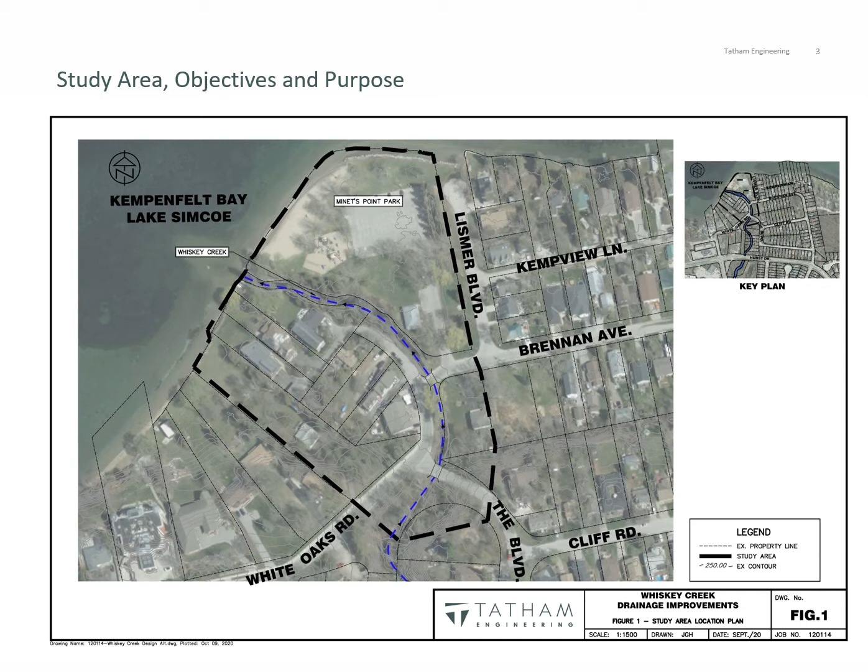The focus of this environmental assessment is to reduce the frequency of flooding associated with Whiskey Creek through the study area. However, we understand the public has concerns regarding Lake Simcoe water levels and flooding along the shoreline. Although shoreline flooding will not be addressed through this EA, we want to provide an overview of how and why Lake Simcoe water levels are managed.

Lake Simcoe is part of a much larger system known as the Trent-Severn Waterway. The Trent-Severn Waterway is 386 kilometers long with 18,600 square kilometers of interconnected lakes, rivers, and channels which connect Lake Ontario at Trenton to Georgian Bay at Port Severn.

Hundreds of thousands of people rely on the waterway for drinking water, flood control, tourism, and recreation, and the waterway provides water for power generation, municipal water supply, agriculture, and supports a variety of fish and wildlife. The city of Barrie is one of nearly 50 communities located on its shores, which is impacted by the management of this waterway.

Lake Simcoe water levels are managed by Parks Canada via the Trent Severn Waterway. Typically, Lake Simcoe water levels vary by 0.4 to 0.5 meters during any given year. The highest levels occur in the spring, and as the summer progresses, the water levels begin to drop. The lowest levels are reached in late fall and winter.

As Lake Simcoe is part of the larger Trent Severn Waterway, actions taken to alter the water levels in Lake Simcoe cannot occur without repercussions elsewhere in the waterway. As such, the management of the Trent Severn Waterway is extremely complex and considers all of the varying needs and impacts that each decision or action will have on the rest of the waterway.

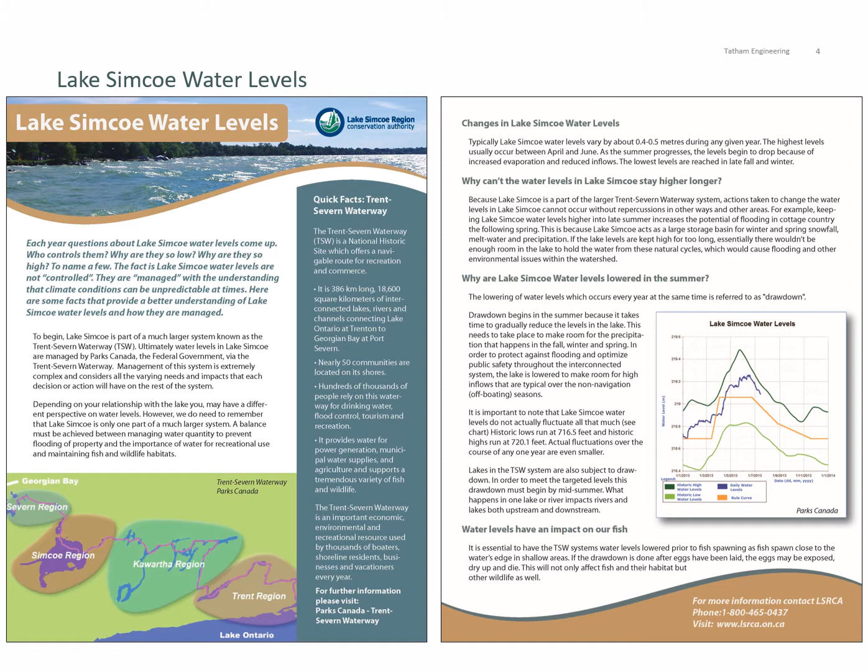Parks Canada describes the management of the Lake Simcoe water levels as follows. Lake Simcoe is controlled by several dams constructed in multiple outlet channels at Washago. Parks Canada monitors and manages water levels throughout the year to ensure sufficient water for navigation, to preserve ecological integrity, and to provide flood mitigation to the extent possible for the lake and the Trent Severn Waterway. Water level management on Lake Simcoe adheres to a complex protocol that incorporates many contributing factors and considers the entire watershed network.

In general, the water levels of Lake Simcoe and Lake Couchiching are operated based on target levels that resemble natural lake level patterns, such as the rapid rise in the spring, the gradual lowering through late fall, followed by the constant levels in the winter. These target levels are based on operational and navigation requirements, topography and hydrology, the protection of public safety, ecological considerations for wildlife and fisheries, as well as socio-economic considerations.

In addition, water levels in Lake Simcoe respond slowly to water management operations, and the lake levels are not easily adjusted by the dams, unless there is significant time in which to discharge water. It may take several days of water management operations using the dams in Washago to impact water levels or to reach the targeted level while taking into account downstream conditions. The Lake Simcoe water levels fact sheet presented on the previous page is available on the project website. Additional information is also available on the Lake Simcoe Region Conservation Authority and Parks Canada websites.

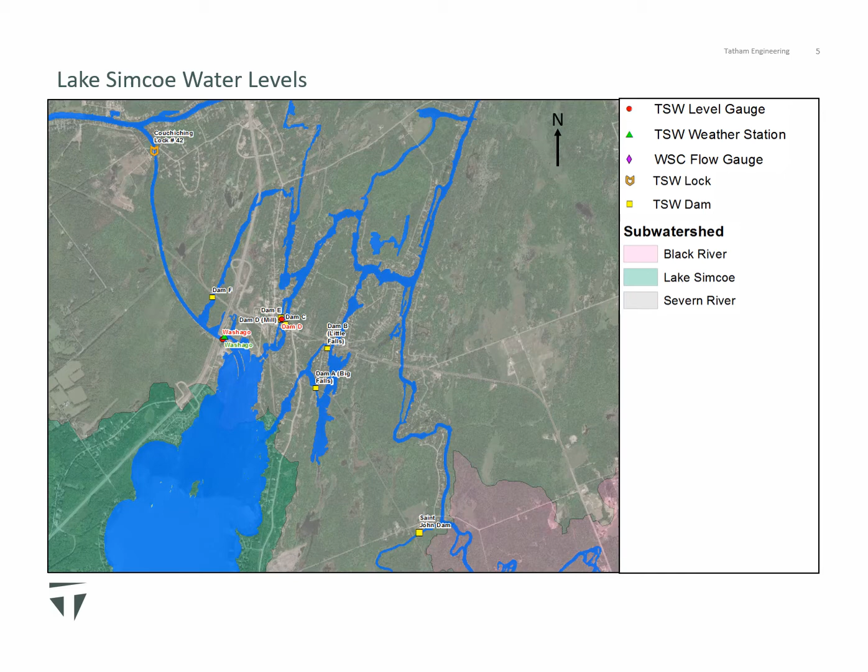So what is a municipal class environmental assessment? A municipal class environmental assessment is a planning and design process to identify, compare, and evaluate alternative solutions to an identified problem. It applies to all municipal road, water, and wastewater projects and significant private projects as per the Municipal Engineers Association Municipal Class Environmental Assessment document. It ensures all aspects of the environment, physical, natural, social, cultural, and economic, are considered in the evaluation and selection of the preferred solution to be implemented.

This EA has been identified as a Schedule B project, which means it has potential for moderate impacts and ends at the conclusion of Phase 2 of the EA process. Consultation is being conducted to present the issues identified, the alternative solutions developed, and the preliminary evaluation of these alternatives, as well as elicit comments and feedback from the public to assist with the confirmation of the preferred alternative solution.

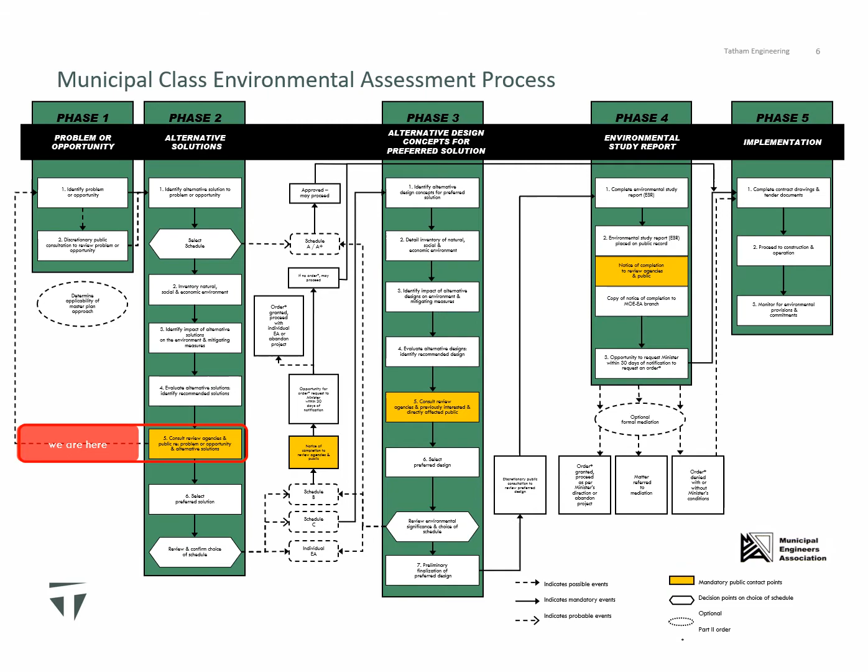Draft Class EA Report and supporting documents. In support of this environmental assessment, a Draft Class EA Report has been prepared, which is available on the project website for review. The Draft Class EA Report summarizes the problem, the project environments, the existing drainage systems, the alternative solutions evaluated, and the preliminary preferred alternative solution identified. For additional information beyond what is provided in this presentation, please refer to the Draft Class EA Report. If you require accommodations to review the Draft Class EA Report, please contact Ling Ling He, Senior Water Technologist at the City of Barrie, at the address and phone number provided later in this presentation.

As part of this assessment, the design storm peak flows through Whiskey Creek within the study area were confirmed with the LSRCA. Also, the existing capacity of Whiskey Creek and the culvert crossings at Brennan Avenue and the Boulevard were established along with the extent of flooding in the study area. Through this analysis, the Boulevard Culvert Crossing was identified as having the limiting capacity of less than the 1 in 2 year design storm peak flow through the study area. The Brennan Avenue Culvert Crossing and Whiskey Creek Main Channel have similar capacities equal to the 1 in 2 year design storm peak flow.

When flow within Whiskey Creek exceeds the capacity of the drainage system, flooding is expected to occur on the Boulevard and Brennan Avenue, along White Oaks Road and Lismer Boulevard, through Minet's Point Park, and through private property. Each alternative solution considered does reduce the frequency of flooding. However, the magnitude of the reduction is dependent on the alternative solution. The hydrologic and hydraulic modeling technical memorandum is included in Appendix A of the Draft Class EA report for reference.

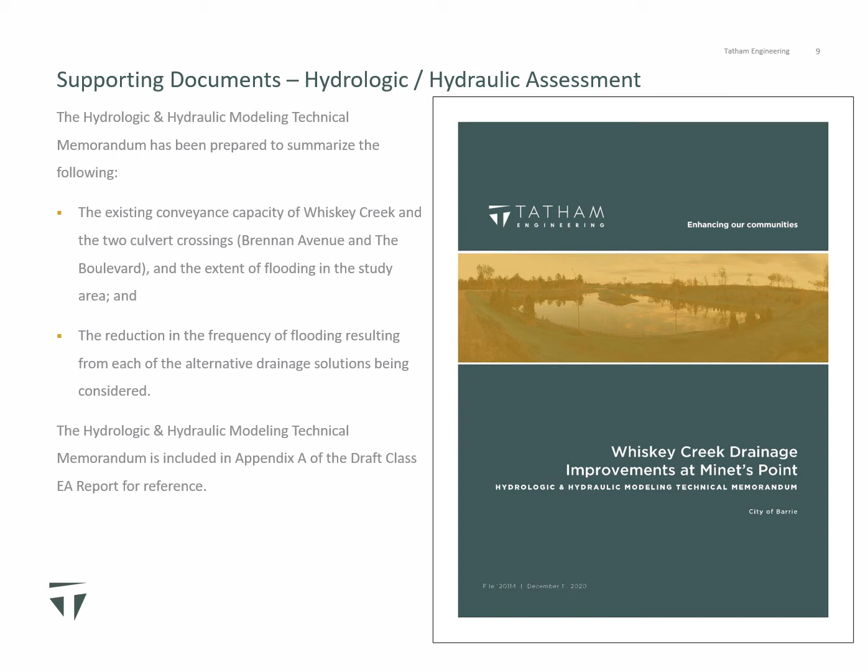Water's Edge Environmental Solutions team reviewed Whiskey Creek to determine if the watercourse is actively eroding, establish what conditions create erosion, and the amplitude the main channel is expected to meander over time. The assessment concluded that Whiskey Creek through the study area is eroding and in a transitional state, and each improvement option considered needs to address erosion. Specifically, any improvements completed along Whiskey Creek should use natural channel design principles and incorporate a 6-meter bankfull channel width into the design. The Fluvial Geomorphological Assessment and Design Alternative Review is included in Appendix B of the Draft Class EA report for reference.

A traffic impact study was completed to establish the existing conditions of the transportation network in the overall area. Specifically, the traffic impact study assessed the existing road network, traffic volumes, and traffic operations. The study concludes that there is ample capacity available on Minet's Point Road and Brennan Avenue to accommodate existing traffic volumes and facilitate future growth, and the existing intersections provide good conditions. No improvements are required under current conditions.

As part of this study, the alternative solutions involving transportation system modifications were evaluated. It was concluded that the transportation system modifications would result in more circuitous travel for both area residents and visitors, given the road system changes contemplated. From a traffic operations perspective, all alternatives can be accommodated. However, the removal of sections of road will also reduce the number of access points to the local road system, which is a concern from an emergency access perspective. The traffic impact study is included in Appendix C of the Draft Class EA report for reference.

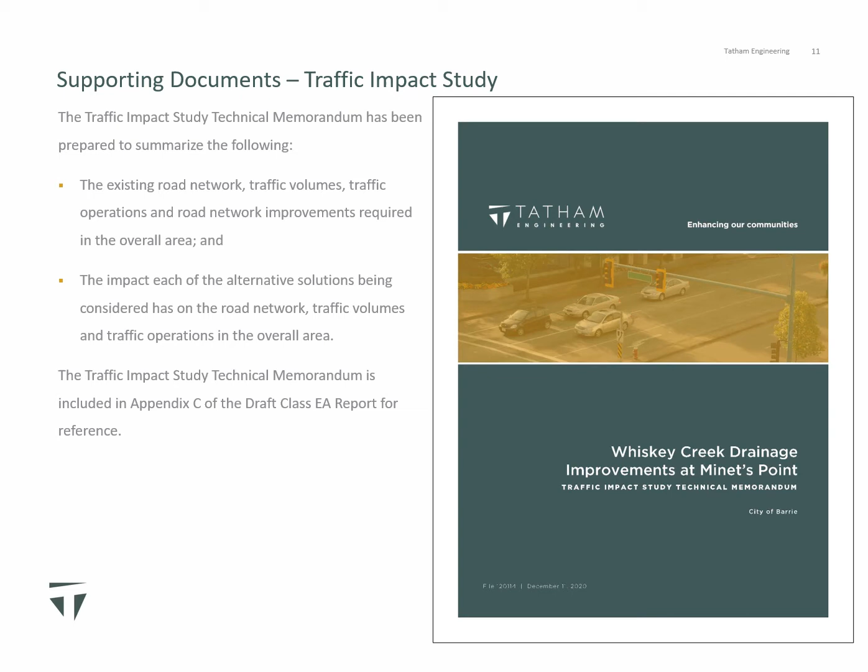Riverstone Environmental Solutions conducted a natural heritage study to identify the natural heritage resources in the study area, evaluate the impact the alternative solutions being considered will have on the natural environment, and identify mitigation measures to address potential impacts of each alternative solution on the natural heritage resources. The assessment concluded that Whiskey Creek through the study area is a cold water fishery, and the mature trees lining its banks provide potential habitat for 2 endangered species, being the little brown bat and the northern long-eared bat, although no endangered species were witnessed in the study area during the site investigations completed. The Natural Heritage Resources Technical Memorandum is included in Appendix D of the Draft Class EA report for reference.

Archeoworks completed an archaeological assessment to identify areas of archaeological potential in the study area and identify any potential impacts related to each alternative solution being considered. The assessment concluded that portions of the study area are considered to retain archaeological potential, specifically the areas that do not exhibit extensively disturbed conditions, such as the pockets of overgrown vegetation flanking Whiskey Creek, the manicured lawns in Minet's Point Park, and several residential properties, and the woodlot immediately upstream and downstream of the Boulevard.

Each alternative solution being considered has the potential to disturb one or more of these areas. As such, a Stage 2 archaeological assessment must occur prior to the implementation of the alternative solutions being considered. The Stage 1 archaeological assessment is included in Appendix E of the Draft Class EA report for reference.

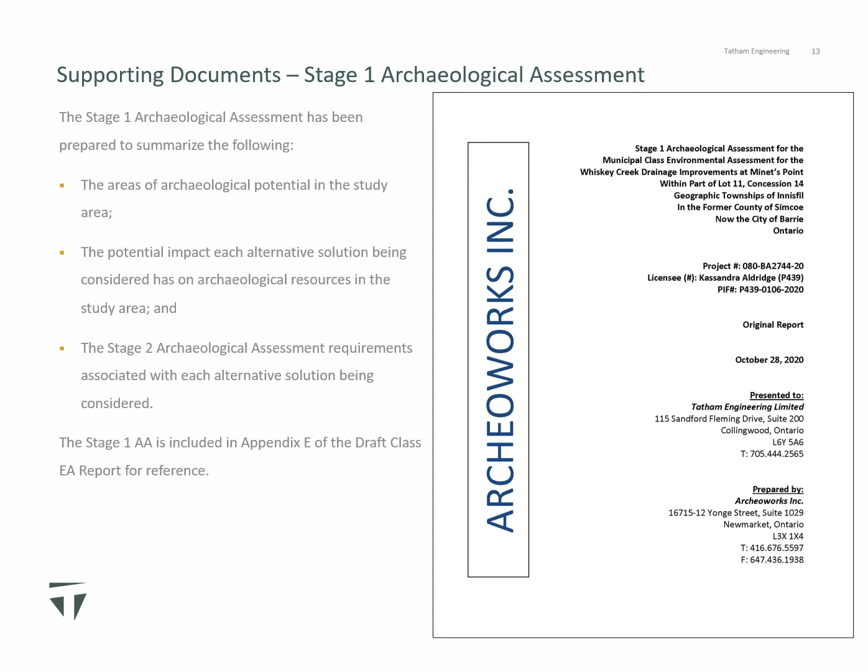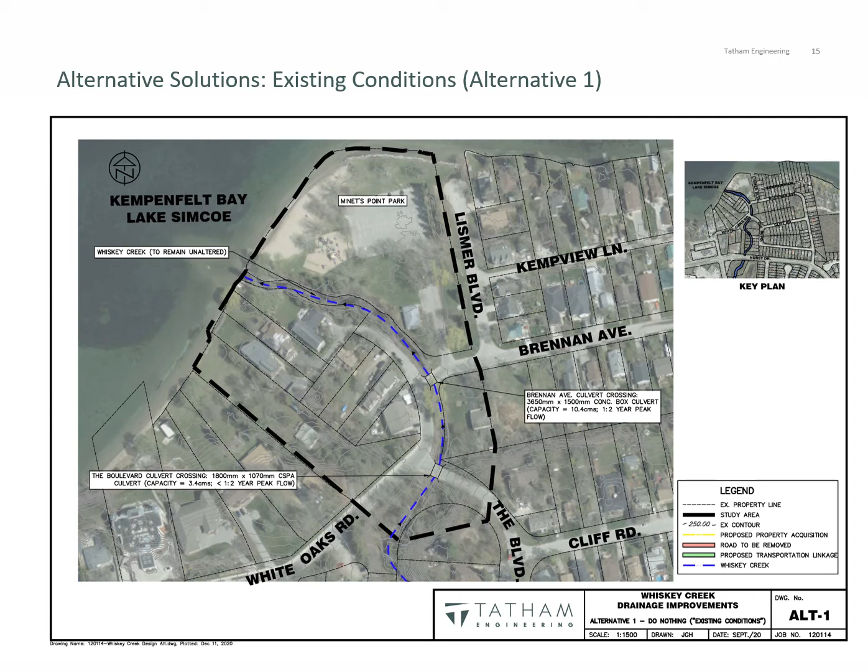Alternative solutions. Alternative 1, or the do-nothing alternative, allows for the consideration of not making any changes to Whiskey Creek from the Boulevard to Kempenfelt Bay. This alternative is being considered to provide a benchmark to gauge the physical, natural, social, cultural, and economic implications of the other alternatives.

Hydraulic improvements to the main channel of Whiskey Creek and its overbanks, along with the culvert crossing improvements between the Boulevard and Kempenfelt Bay, were considered as Alternatives 2 and 3. Under Alternative 2, the culvert crossings of Brennan Avenue and the Boulevard can be replaced with culverts sized to convey the 1-in-100-year return frequency design storm peak flow, and Whiskey Creek can be improved from the Boulevard to Kempenfelt Bay. However, several potential conflicts and constructability issues have been identified under Alternative 2, which has led us to explore other alternatives.

Under Alternative 3, the same improvements described under Alternative 2 can be implemented to a reduced level of service, i.e., designed to convey less than the 1-in-100-year return frequency design storm peak flow. An opportunity exists to improve the culvert crossings and watercourse from the Boulevard to Kempenfelt Bay to reduce the frequency of flooding while reducing/eliminating the conflicts, relocations, and constructability issues identified under Alternative 2. Alternative 3 is the preliminary preferred alternative solution so far.

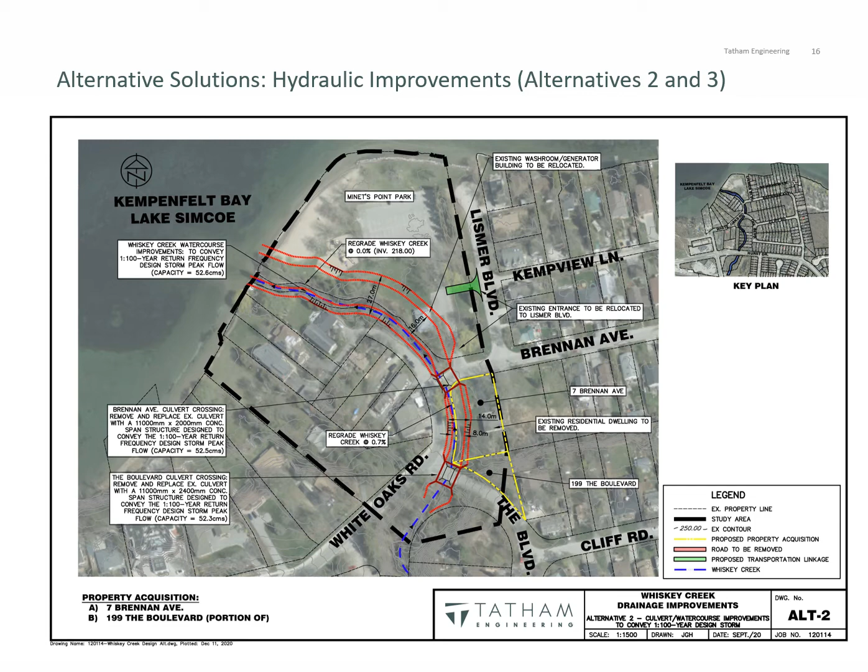The hydraulic improvements were also considered with transportation system modifications. The transportation system modifications included the removal of Brennan Avenue, the Boulevard, and both roads at Whiskey Creek. Removing these sections of road would reinstate the watercourse, removing a restriction to flow that causes flooding in the area. However, removing the roads will not generate a significant reduction in flooding without implementing the hydraulic improvements under Alternatives 2 and 3. The removal of Brennan Avenue is considered under Alternative 4, the removal of the Boulevard under Alternative 5, and the removal of both roads under Alternative 6.

With one or both of the roads removed, the creation of new transportation linkages in the area to address traffic and pedestrian movement and emergency service requirements were also considered under Alternatives 4 through 6. Recommendations that modify the road network are unwarranted and are not recommended as part of the preferred solution.

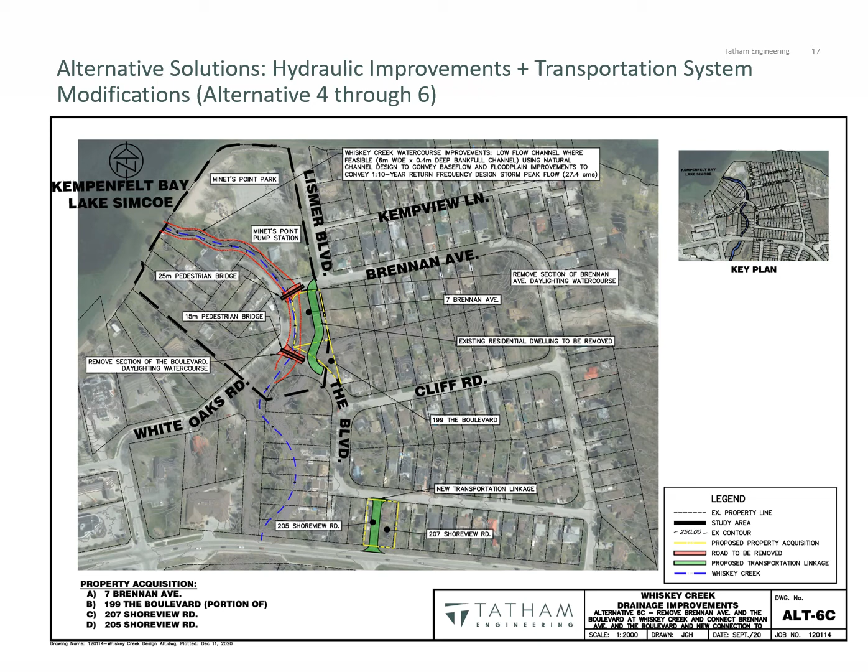As mentioned previously, Alternative 3 is the preliminary preferred alternative solution as it best satisfies the study objectives. Alternative 3 significantly reduces the frequency of flooding through the study area. Measures can be incorporated into the design to address erosion. Impacts to the road network are minimized. Capital and life cycle costs are less than the majority of the other alternatives considered. Threats to public safety are reduced, and fish and terrestrial habitat improvements can be incorporated into the design.

Alternative 3 was identified as the preliminary preferred alternative solution through an evaluation of each of the alternative solutions' impacts on the physical, natural, social, cultural, and economic environments. Alternative 3 is only the preliminary preferred alternative solution, and the alternative drainage solutions will be re-evaluated and a preferred alternative solution will be confirmed after this PIC in consideration of the feedback received from the public and interested stakeholders as part of the EA process. It's noted, the preliminary alternative solution may change as a result of the feedback received. We will use this feedback to confirm or potentially revisit the preliminary preferred alternative solution.

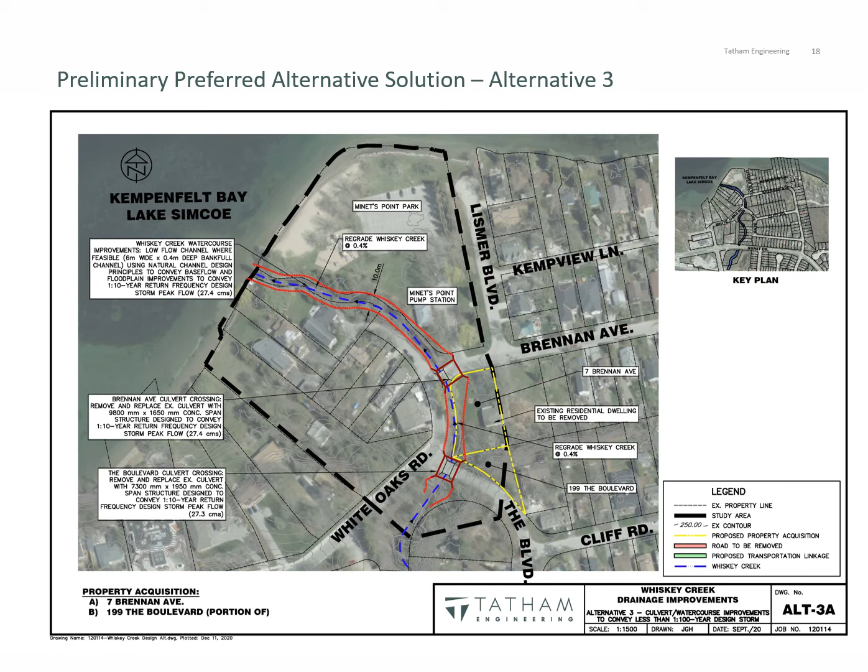The alternative solutions were evaluated based on their costs and benefits. The alternative solutions were evaluated based on their impact on flooding, erosion, and on the transportation systems. Upfront capital costs, 100-year life cycle costs, and local business impacts were evaluated along with archaeological, public safety, private property, noise, access, and traffic movement impacts. Finally, aquatic, fisheries, and terrestrial impacts were considered for the natural environment.

Based on the severity of the impacts, both positive and negative, a score was assigned to each alternative solution under each evaluation criteria, and the accumulated score was used to identify the preliminary preferred alternative solution. Alternative 3 generated the greatest overall benefit on the project environments through this evaluation.

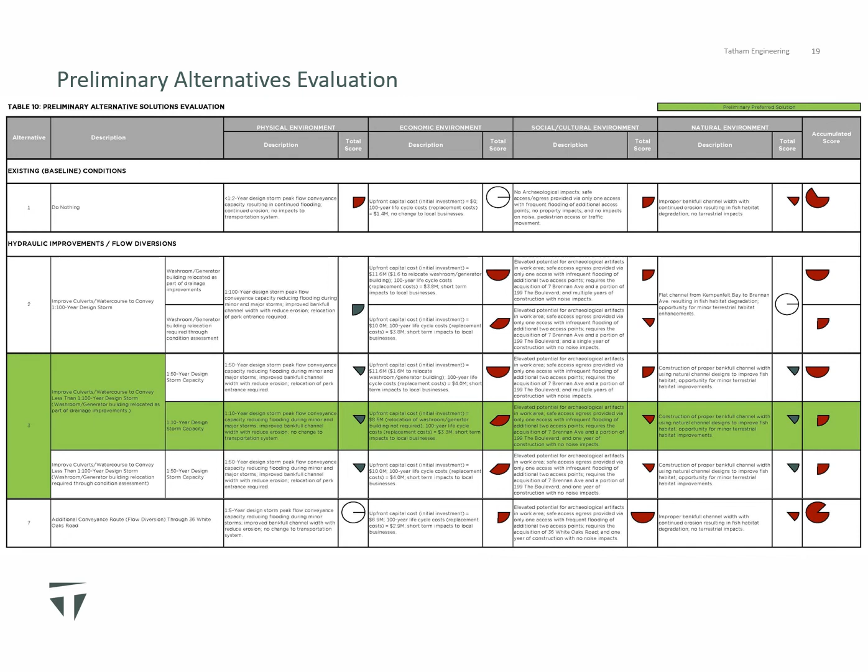As previously mentioned, the hydraulic improvements under Alternatives 2 and 3 were evaluated in combination with the transportation system modifications under Alternatives 4 through 6. This evaluation was completed to determine if the hydraulic improvements plus transportation system modifications produced a greater overall benefit on the project environments compared against the hydraulic improvements alone.

Through the evaluation completed, it has been determined that the transportation system modifications generally produce an overall negative impact on the project environments. As such, the hydraulic improvements under Alternatives 2 and 3 generate greater overall benefits on the project environments alone than when paired with transportation system modifications. The transportation system modifications are not recommended as part of the preliminary preferred alternative solution.

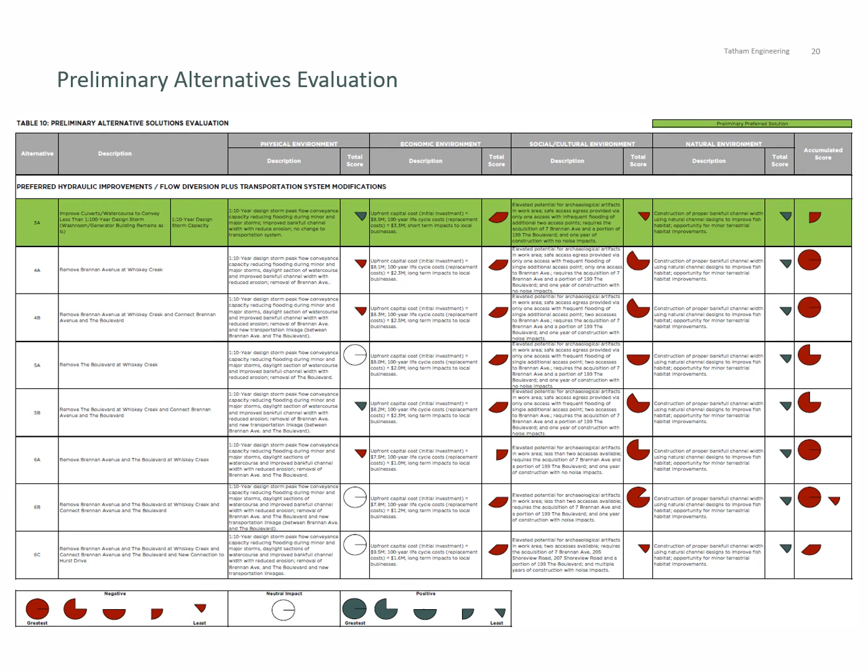Virtual meeting, question and answer sessions, comments, and next steps. As COVID-19 protocols prohibit in-person public meetings, virtual public meeting question and answer sessions will be held to allow participants to ask questions and provide comments regarding this environmental assessment. The virtual public meeting Q&A sessions will be held from 5 p.m. to 7 p.m. on Tuesday, February 9th and Tuesday, February 16th. The virtual public meeting Q&A sessions will be held using Microsoft Teams, which allows participants to join by computer, mobile app, or phone.

You must register with the City of Barrie if you wish to attend the virtual public meeting Q&A sessions. To register, please contact Ling He, Senior Water Technologist at the City of Barrie via email at lingling.he@barrie.ca, via telephone at 705-739-4220, extension 5291, or use the electronic registration form available on the project website.

Registration for the virtual public meeting Q&A sessions will close at 4 p.m. or 1 hour prior to the start of each meeting on the respective meeting date. Upon registering for the virtual public meeting Q&A session, details allowing each participant to connect to the session will be provided.